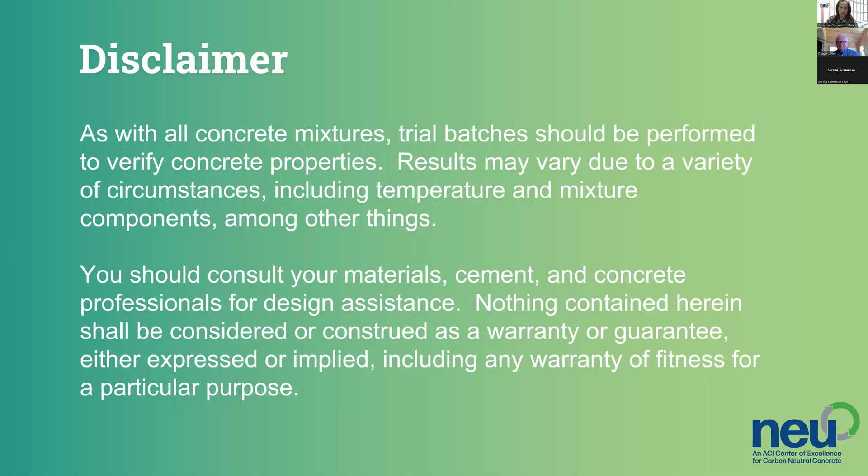Today's speaker is Professor Doug Hooton. He is the NSERC CAC Industrial Research Chair in Concrete Durability and Sustainability. His research involves finding ways to reduce the greenhouse gas emissions associated with concrete infrastructure. He investigates the use of materials such as supplementary cementitious materials, ground limestone, to produce a stronger and more durable concrete product. His research has informed the specification codes associated with the American Concrete Institute, the Canadian Standards Association, and ASTM standards. He has conducted research on slag cement since 1975.

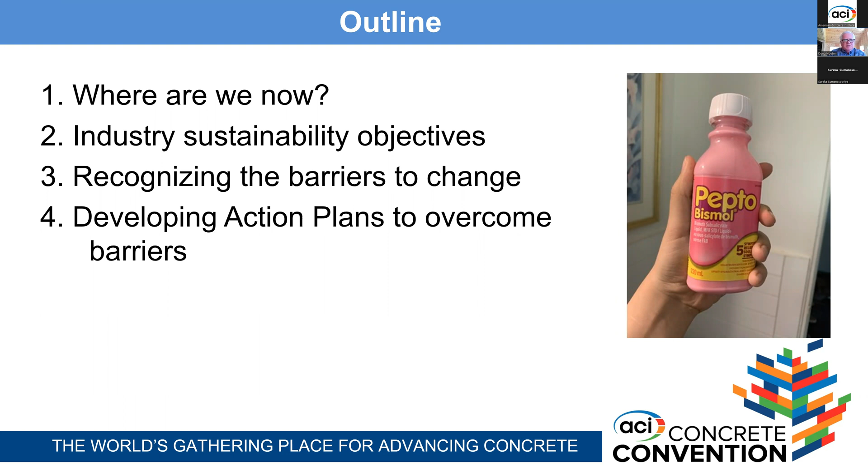But I thought I'd start and just talk about this. People talk about concrete being a high carbon emitter. But concrete is sustainable. It has the lowest embodied carbon and energy footprint of any construction material, at least on a mass basis. And it mainly uses local materials and typically has a long service life and is recyclable at the end of its service life. But we still need to do things better to reduce the global warming potential.

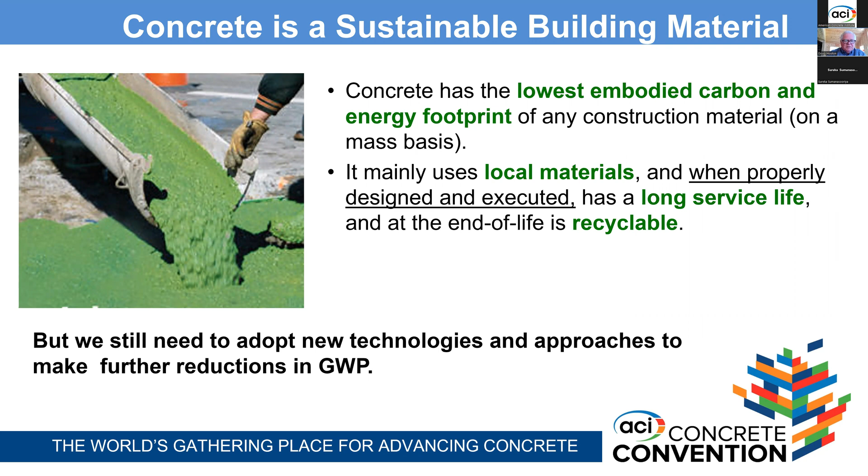So this is some data from the University of Bath that was developed some time ago, but it shows embodied carbon on the vertical axis, embodied energy on the x-axis. And you see all the materials lined up there. And concrete is on the lower left, which means it's the lowest on a mass basis per kilogram of any of the building materials. And if you look at cement, which is the biggest contributor to the global warming potential in concrete, it is further up, that blue circle there.

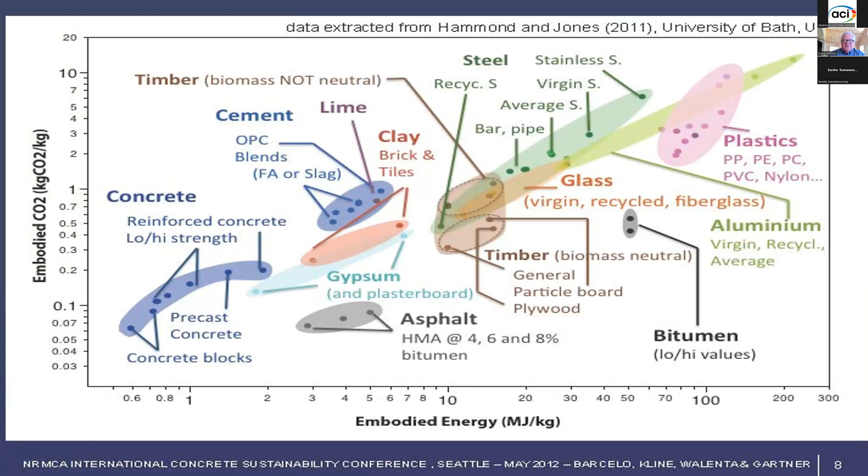Now, the other materials, let's see, glass, steel, even timber are up further on this. And again, a lot of this depends on how you account for things, but they were looking at all building materials and not with any reference to any one.

So what causes this is that we use over 20, in fact, this is probably out of date, billion tons of concrete each year. So the global impact of concrete is about 7% of the anthropogenic CO2 that's emitted and almost 4% of the energy. However, in the industrial nations like Europe and US and Canada, it's only in the range of 1% of total emissions. And that's EPA data. But the big players in this market, the large volumes here, the 20 billion tons, they're coming from China, India, and it's growing in Africa.

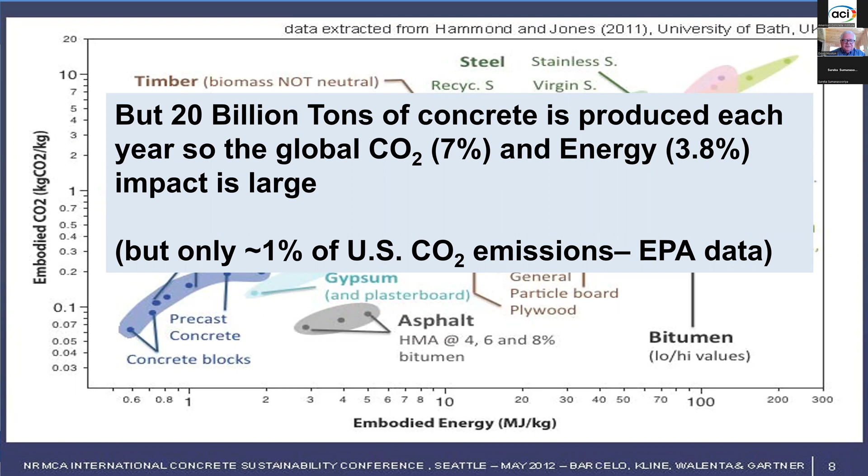China produces more cement in 2 or 3 years than the US did in 100 years. So it's a different scale. But again, Portland cement is just one part of the concrete. If you look at this concrete data, about 96% of the CO2 coming from concrete is coming from the cement, the dark blue. And about 85% of the embodied energy is also from the cement, if you're only using Portland cement concrete.

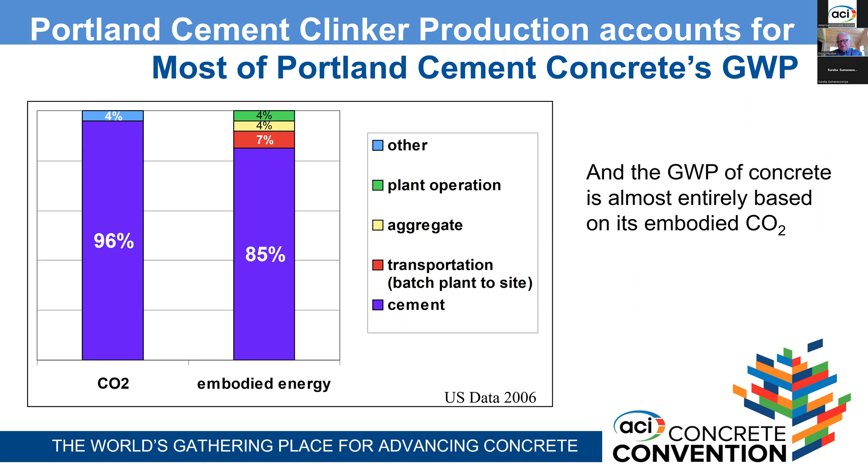And most of the global warming potential in concrete is based on its embodied CO2. We don't have a lot of the other types of issues. However, the US concrete industry has reduced its carbon footprint significantly between 2014 and 2021. And that's based on industry-wide third-party EPDs, environmental product declarations, surveying all their members in 3 different time periods, 2014, 2019, 2021. And you can see they've reduced their carbon footprint by 21% over those 7 years.

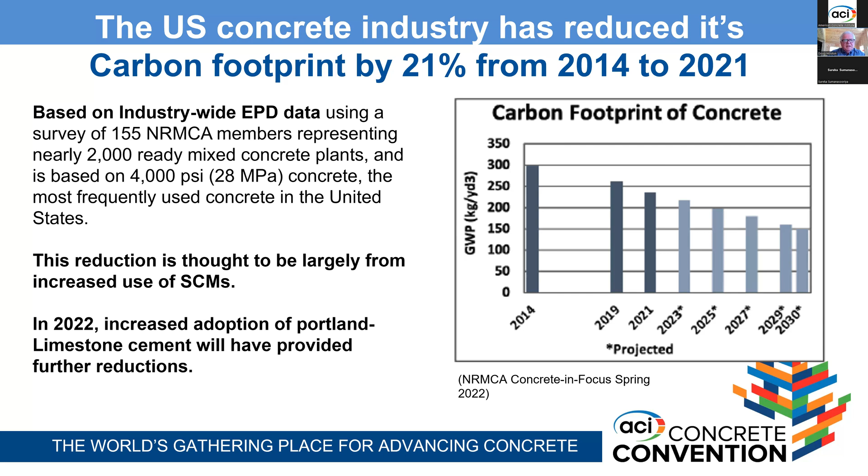And that was before Portland limestone cements were introduced in a big way in 2022. So it doesn't include that part of it. And it'll continue to go down. So the reduction between 2014 and 2021 is largely thought to be due to the increased use of supplementary cementitious materials. Now, the whole cement industry is focused on accelerating its reductions in global warming potential.

And they have developed a roadmap that came out in 2021. The Canadian Cement Association just came out with one recently. The Europeans have one as well. And they follow a similar approach. They want significant reductions in embodied CO2 by 2030, and net carbon neutrality by 2050, which is the global goal. However, getting to net carbon neutrality is probably going to require things beyond what I'm going to talk about today, including carbon capture and sequestration and use of non-CO2 emitting fuels like hydrogen or electric firing of kilns.

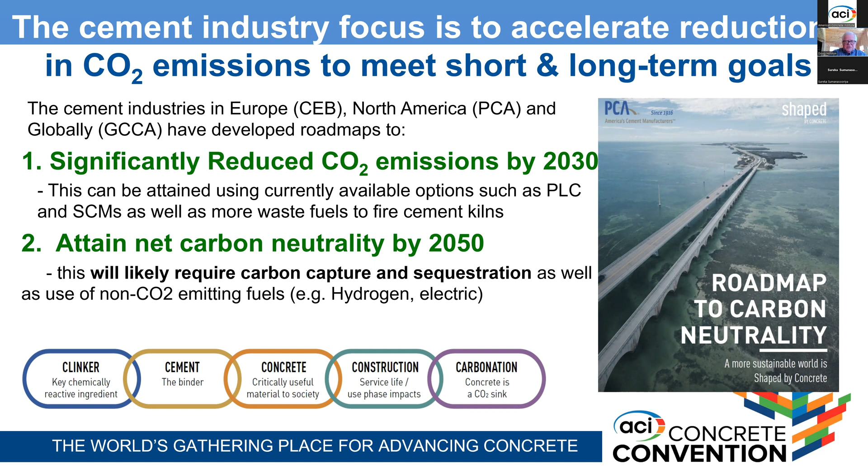And of course, there's 5 points on the chain at the bottom. They start with the cement clinker, which is where most of the CO2 is coming from. Then how much clinker goes into the cement that's sold. Then minimizing the cementitious materials in concrete. And there's things you can do in construction to reduce the amount of concrete that's used, more efficient designs. During its life, concrete also carbonates to some extent, so approximately 8% of its initial CO2 is taken up by the concrete in structures over its service life.

So what are the low-hanging fruit? If we're going to go for 2030 goals, which is only 7 years away, we've got to do things now. The low-hanging fruit available in the market now, allowed in standards including the building code: use Portland limestone cement. They offer about a 10% CO2 reduction over straight Portland cement with very little change in performance. I shouldn't say no change. There might be small differences in admixture dosages required, and you have to do optimization with any new material.

Increase the levels of supplementary cementitious materials in the concrete. The CO2 reduction is proportional to the cement replacement. You're replacing cement clinker by putting SCMs in the mix, as long as you're not increasing the total cementitious materials content. And one that has great results but isn't being used very effectively in North America is optimizing total aggregate gradations. You can reduce the cement paste fraction by better packing of the aggregates, which typically need at least 3 size ranges combined together to optimize.

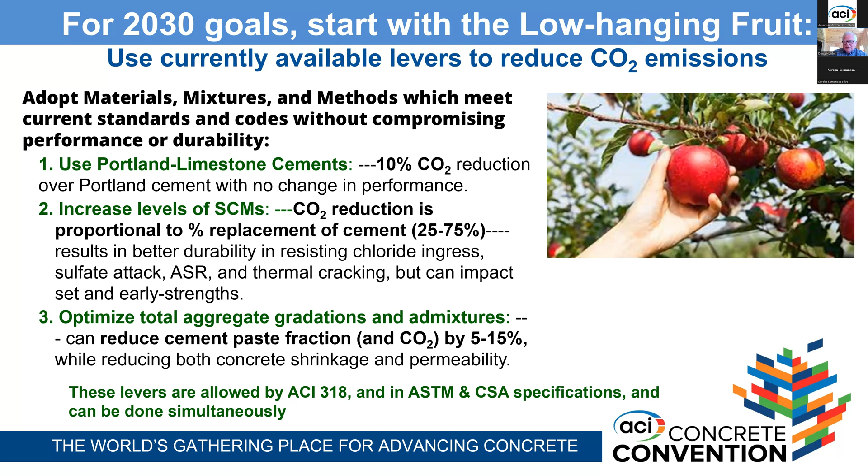And you can significantly reduce the amount of cement paste you need in the mix by about 5 to 15%. At the same time, you get reduced shrinkage and reduced concrete permeability, because shrinkage and permeability take place in the paste fraction. So if you reduce the paste fraction, you reduce those. And chemical admixtures allow us to do that while maintaining the required workability for placement.

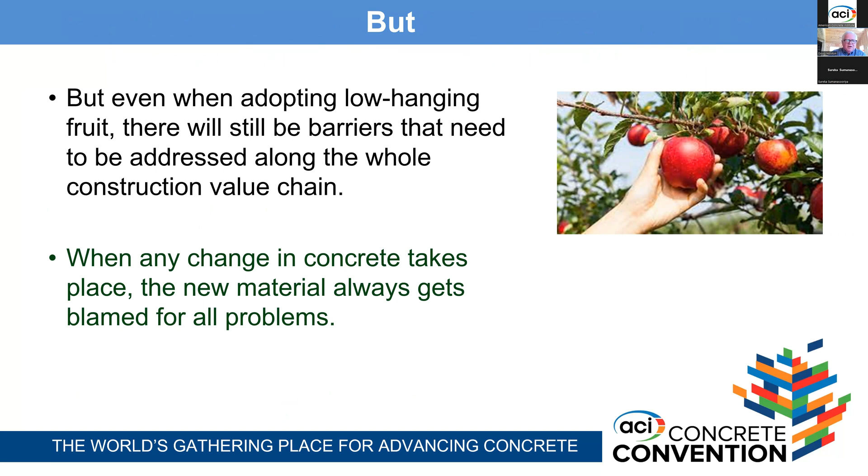But even with these low-hanging fruits, there will still be barriers that need to be addressed along the construction value chain. When a change in concrete comes along, the new materials always get blamed for any problem that occurs, and problems occur every day of the week in various applications. One example is the slow adoption of Type IL cements under C595. They were approved in 2012 in the United States through ASTM and AASHTO, even earlier in Canada.

And they meet all the same setting time and strength development requirements as a Type I/II Portland cement, but have 10% lower CO2 emissions. They've been used in Europe for almost 40 years now, and in some US states for almost 20 years. Colorado and Utah are 2 examples, and they were used before IL was available under the C1157 performance specification. So it's been used in interstate pavements and other applications since 2005.

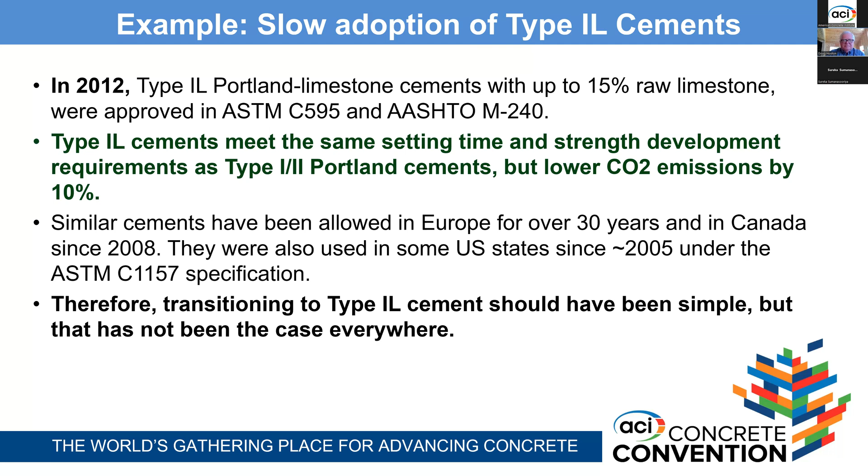Therefore, transitioning to Type IL cement should have been relatively simple, but it hasn't been the case everywhere. And why did the cement plants suddenly stop producing Type I in some areas and jump to IL? Because of supply chain restraints. Cement plants and terminals don't have the silo capacity for holding a cement that's not being purchased by their customers. So if they weren't required to use 1L, nobody would order 1L.

If you make it 1L, then they don't have room for I and 1L in their silos, especially when there's a shortage of cement materials. So this forced them to jump into an adoption of 1L cement. So in 2022, it was adopted. They made decisions in certain regions to jump right into it. And so last year, IL grew to about 25% of the total US market. It's much higher in Canada.

Also on the supply chain issue, most concrete plants don't have the extra silos for handling additional cements. So if a concrete producer wants to use 1L cement, they probably don't have room to have I and 1L in the same plant and have whatever their favorite supplementary material is, fly ash, slag, or whatever it is they're using. And all DOTs pretty much accept IL cement. So it's not the DOTs that are holding us back.

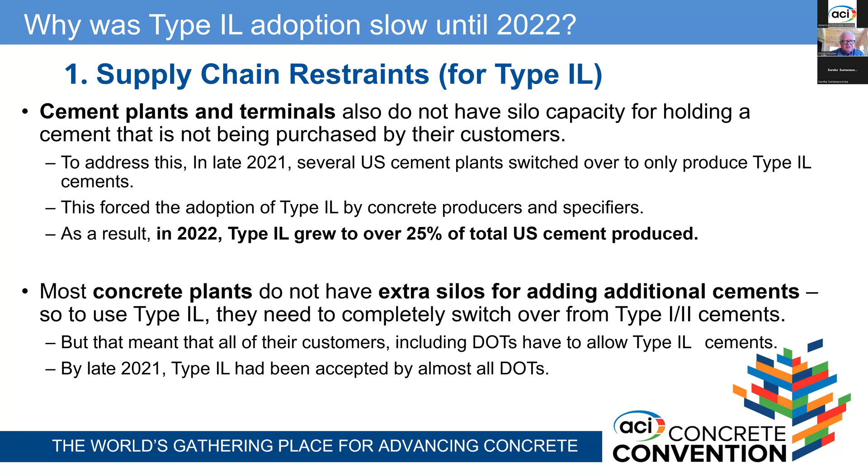Now, not everybody's a fast adopter. There's some reluctance to specify. Like I say, 2012 is when they were adopted in the standards. Some DOTs took longer than others. Caltrans, for example, was a pretty slow adopter. It wasn't until 2021 where they had finally adopted it, and only after they did their own internal study showing it did no harm. And it turns out the study that was done for them showed exactly the same things that had been shown earlier when it was developed.

But there's a lack of trust in the industry in some of this reluctance to move on to new things, and lack of trust in the experience and research done by others. It wasn't done in your own backyard sort of thing. So if we just take IL cements into the specifications slowly, then we're not going to make this deadline. We don't have 9 years left to meet 2030 targets. So we need to accelerate the adoption.

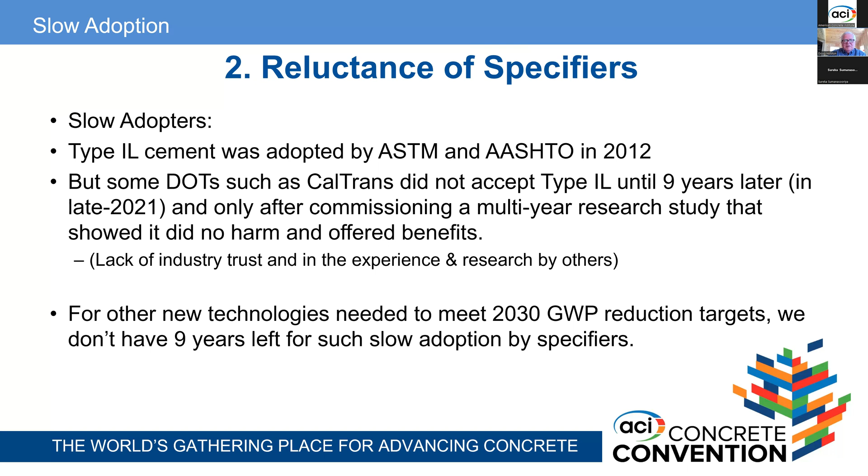And there has been pushback. In most places where Type IL was rolled out, there's very little concern. People are just using it. If there was a change, they made minor adjustments. It's typically what you do anytime you switch cement supply at a ready mix plant. You're going to do your own in-house verification of your water content, your admixture requirements to get the properties you need out of your concrete.

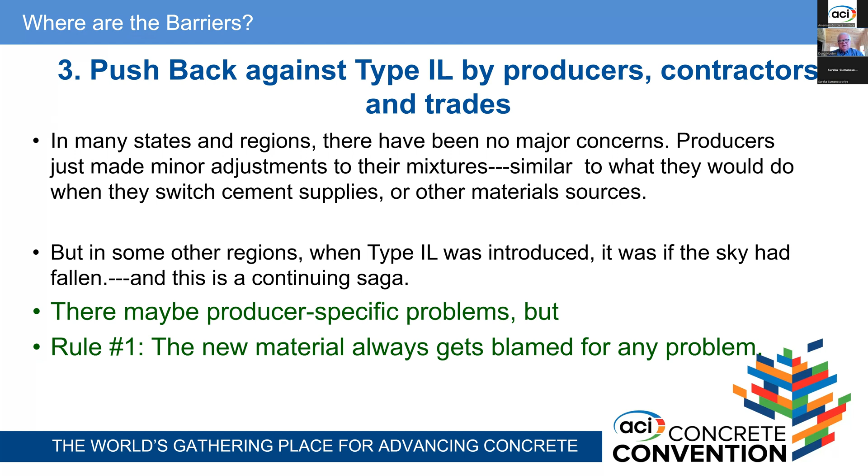But in some areas where it was introduced, it was as if the sky had fallen. And this seems to be carrying on in certain areas, but it's not huge areas. So rule number one, going back to what I said earlier, the new material always gets blamed for any problem. So when people have problems, if there was something new in the mix, that's what gets blamed. It's not the first time that's happened in my career. And so these are some of the examples of claims. People claim all kinds of interesting things.

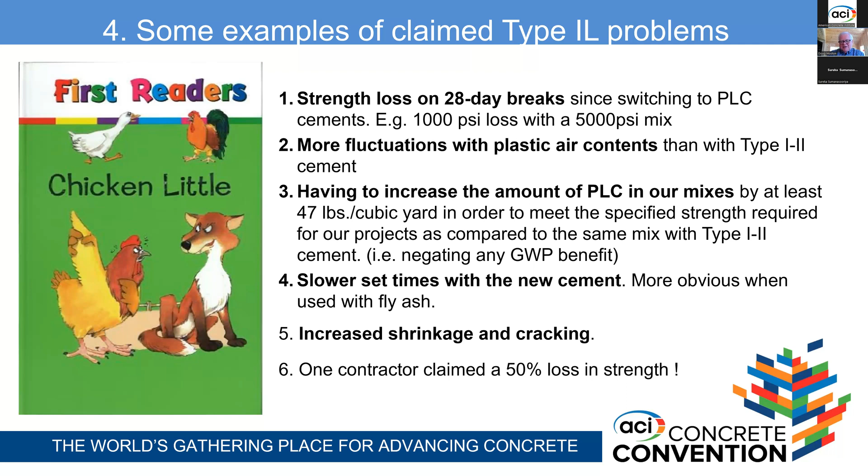Strength losses at 28 days since switching to 1L, 1,000 PSI loss in a 5,000 mix, more fluctuation with air contents. Again, that's admixture adjustments. Having to increase PLC by at least the amount they took of the limestone in the mix, negating any effect, slower setting times, increased shrinkage and cracking. One contractor claimed a 50% loss in strength, and you know that's not going to be accurate at all. So people are blaming anything that happened to them on this new adoption.

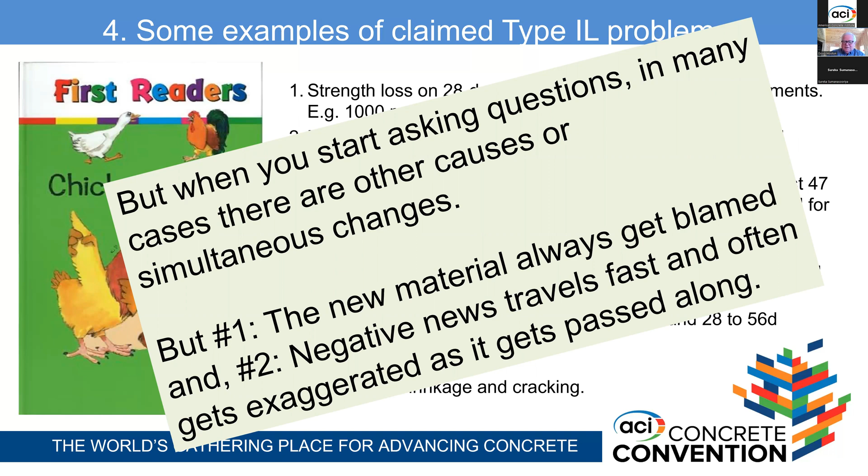And you start asking questions, and I've talked to various ready mix producers in various states where they've had some issues. Typically you find out other things were happening at the same time, or there's other causes. But again, new material always gets blamed, and negative news travels fast and often gets exaggerated as it gets passed along. It's like bad news everywhere with the internet. But there's lessons to be learned by everybody involved, including the cement industry.

You only get one chance to make a good first impression. When introducing any change, the industry has to supply sufficient customer support and communication to help that transition, especially with the smaller independent producers. A lot of the big integrated producers were aware of it, so they didn't have any issues. And again, helping make the required changes, giving suggestions on admixture changes and other minor adjustments. But we need to anticipate these and overcome these barriers to meet targets.

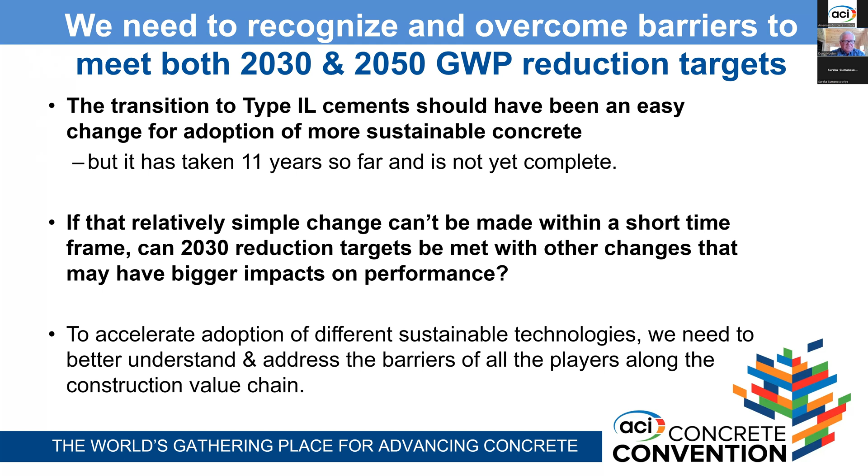The transition should have been an easy change to more sustainable concrete. But it's taken 11 years so far and it's not yet complete. They said about 25% last year in the US was Portland limestone cement. If we can't make that simple change by 2030, then how are we going to meet targets with other changes that are likely coming? They're going to have bigger impacts. So we need to better understand these concerns and address the barriers along the construction value chain to help speed things up.

So where are the barriers? People think standards and specifications and codes are the barriers. They're often seen that way. But many of the levers that I'm talking about for improved sustainability are already allowed in codes and standards, but they're not always widely accepted in practice, either due to perceived risk or supply chain issues.

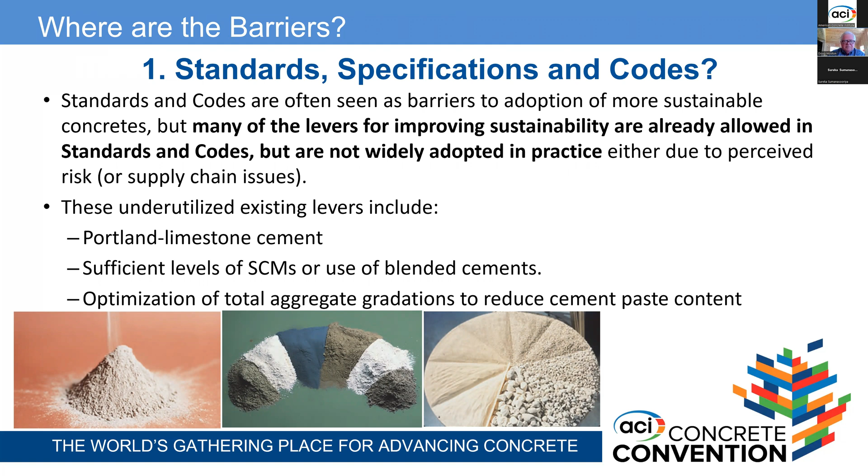These include the Portland limestone cement, sufficient levels of supplementary cementitious materials or blended cements if they're available in the market, and optimization of total aggregate gradations to reduce the amount of paste in the concrete. And you'd think that would be in the ready-mix concrete producers' best interest if they have the bins for it, because cement's the most expensive component of their concrete.

And specifications are changing. We now allow ground glass pozzolans, the 1866 standard. 618 has been changed this year to allow landfill coal ash to be harvested because of the reduction in the amount of coal power plants still producing quality ash. A lot of the stuff that's in landfills is better quality than the currently produced ash at a number of these plants. And it now is allowed to be processed to meet the requirements and sold as fly ash or as coal ash.

We're looking at a new performance spec for supplementary cementitious materials. That's still being validated. And the ASTM 1157 performance specification for hydraulic cement has existed since 1992, so over 30 years, but it's rarely specified. Because apparently everybody talks about moving to performance. We wish they had a performance standard that wasn't prescriptive, but when you give them a performance standard, apparently they don't trust performance. So very few people have adopted that, very few states or other specifiers.

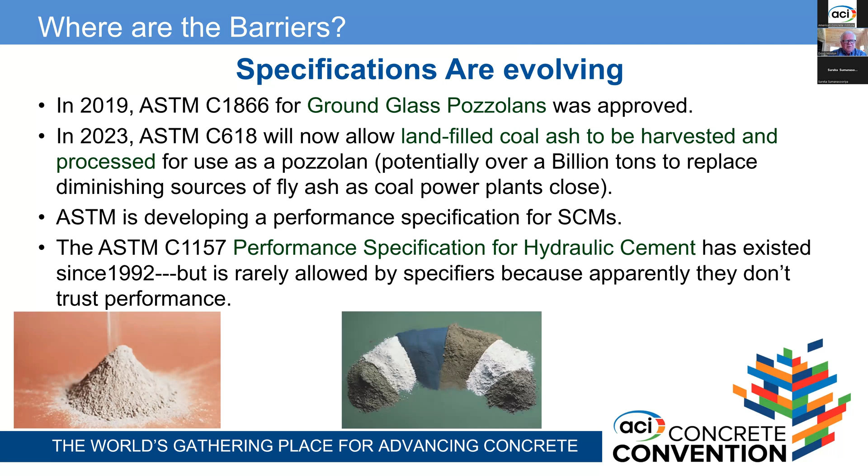And that's too bad because they seem to want to know what the ingredients in the cement are, as opposed to trusting the performance. It's like saying, well, I wonder what metal's in the car body of my car, as opposed to saying, I want it to last 10 years without rusting. Again, we need more standards that are less prescriptive.

But there's also non-hydraulic cement materials being developed. There's sort of the more radical out there versions of different materials that are potentially coming on the market. We don't have a standard set for geopolymers, or for cements that set by carbonation, although we're getting close with the carbonation cement standard. And of course, before you can go into a building code like the ACI 318, you've got to have a national specification.

And some of these new materials, the radical ones, and I'm not talking about the low-hanging fruit here, I'm talking about these further out there products. The test methods we have in C94, for example, some of the new materials can't be tested to the standards without making some small adjustments because they perform differently.

Now, ACI 318 does permit the use of alternative cements as long as the LDP, the licensed design professional, approves it and the code official who has jurisdiction on that project allows it. And the International Code Council has an evaluation service that has developed AC 529, an acceptance criteria for low carbon alternative cements. So it's an evaluation process, but I'm not aware that anybody's actually used it yet.

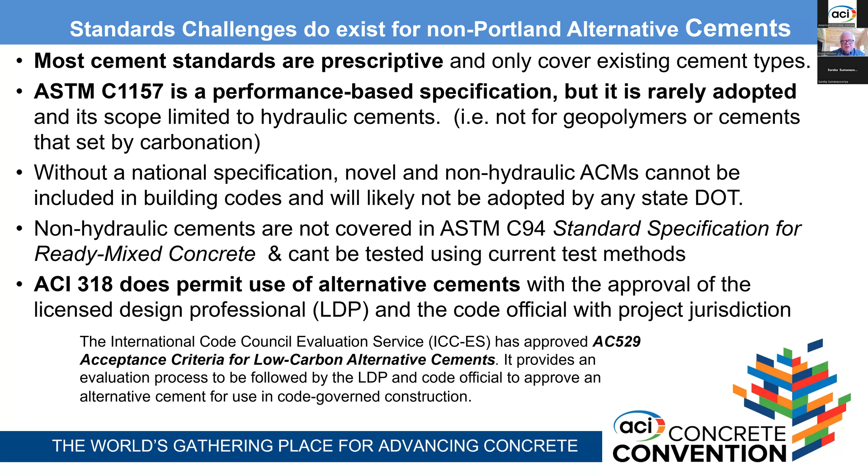And of course, one of the problems with specifications is specifiers aren't always using the latest specifications, the latest ASTM specs, the latest building code version. Design firms often cut and paste from previous projects because we've done it before, it's easier, there's low risk.

Some specifying authorities want performance, but they add prescriptive limits on materials and mix designs. Prescriptive minimum cement contents are not helpful if we're trying to reduce carbon emissions. And a lot of these minimum cement contents were based on work that was done 50, 60 years ago, before chemical admixtures and SCMs were on the market.

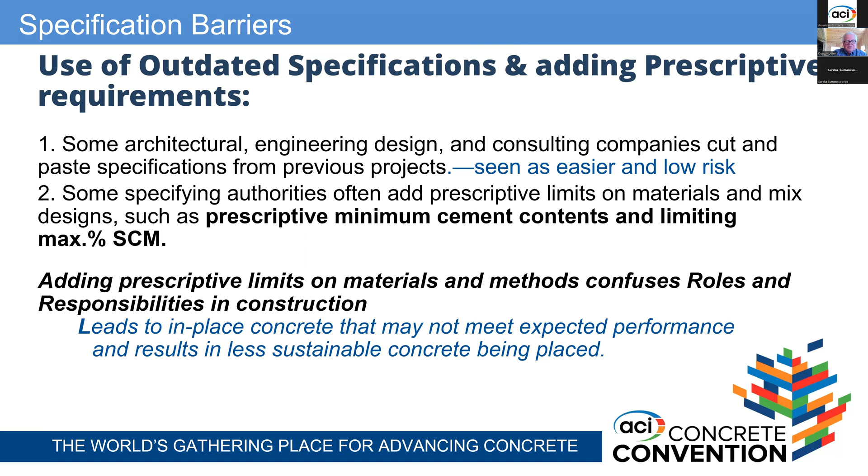And some of them don't allow using supplementary cementitious materials or optimizing for their use, again because of old prescriptive specifications that have been there for decades. And unfortunately, when you start adding prescriptive requirements on top of performance, it confuses the roles and responsibilities of people: the contractor, the specifier, the producer. And it leads to concrete that may not meet the expected performance and results in less sustainable concrete in the end. So current prescriptive requirements can make it difficult to adopt materials and mix proportions that can lower global warming potential.

For example, 318, just as one example, for chloride exposure, a C2 exposure, they only say you have to meet a strength limit, 5,000 PSI, or a maximum water binder ratio of 0.40. And apparently that gives you corrosion resistant concrete for structures, but those are indirect measures. Strength is there as an indirect measure of the water cement ratio, and water cement ratio is one input into what makes low permeability concrete that will resist chloride ingress. But they're not testing any direct measure of that chloride resistance.

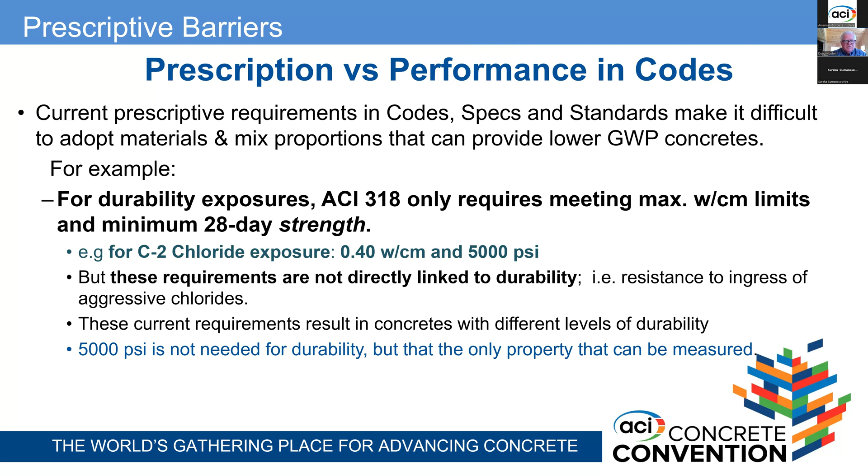And there's only one variable here. C2 covers all chloride exposures in 318. Typically, we don't need 5,000 PSI, you need low permeability, but we're not measuring anything that tells you that in that code. And just as an example, this is some work that Michael Thomas did, showing the Coulomb charge on the vertical axis versus water cement ratio on the x-axis.

And it shows three different concretes: straight Portland cement, 25% fly ash, and 25% slag plus about 5% silica fume. And it shows at the same 0.40, you could have a 2,500 Coulomb concrete with the Portland, about a 1,500 Coulomb concrete with the fly ash, and less than 1,000 with the green mix there at the bottom. So they'd all meet the C2 spec in 318 if they were 5,000 PSI and met the water binder ratio.

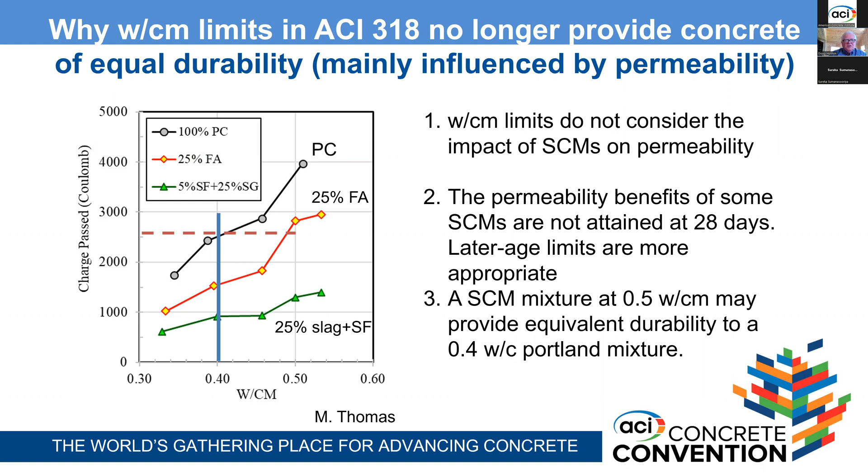But they're all completely different durabilities in terms of how long those things are going to last in chloride exposure. So we're talking about decades of different performance based on the different penetration resistance of those concretes, but they're all equal under the code at present, because there's no performance measure. So that's something we're trying to address, but it's an uphill battle.

So let's talk about the risk to adoption of new technologies. Life safety, of course, is a big risk, and certainly we're not going to compromise on that. It's the primary focus of a building code. And one of the issues with some of the really novel materials is they haven't been tested for structural properties, so everything that's needed isn't there: bond strength, flexural strength, shear strength, fire resistance, all those things that would be needed for a building code.

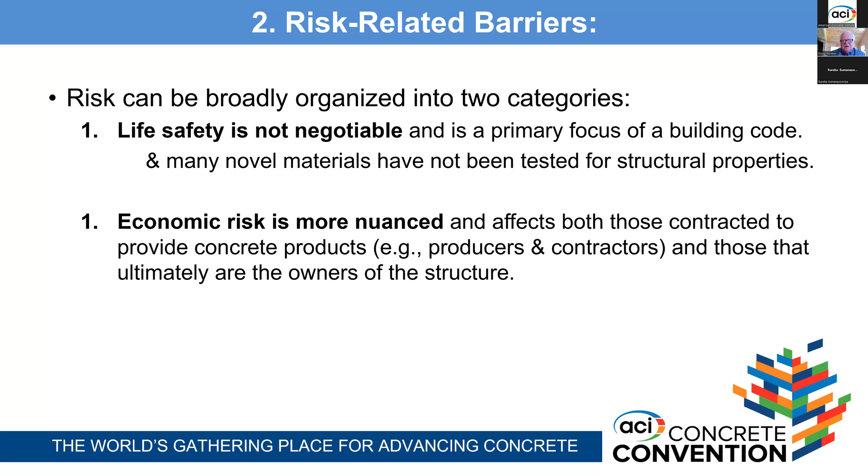But the economic risk is the bigger risk, because the materials I'm talking about aren't life safety issues. They're known materials, just in different proportions. So the risk here is more nuanced. People see different risks, both the producers and contractors, and those that are ultimately the owners of the structure. So where do people see risk?

Suppliers and contractors see economic risk when changes occur that affect their profitability or negatively impact productivity or the ability to achieve full payment for their work. So there may need to be incentives in contracts to incentivize meeting global warming potential targets.

Owners experience risk from loss of functionality, increased maintenance, or reduced service life if poor performance occurs as a result of using these new materials. And so adoption of new technology requires some sharing of risk. Non-equitable distribution of perceived risk can result in over-design and derail the implementation of a new technology or get rid of any global warming benefit that occurs.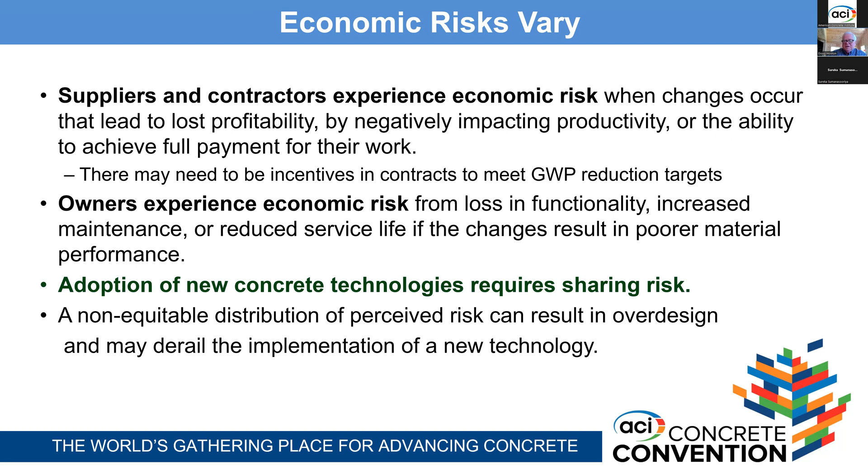So to move forward, everybody needs to be involved in that process. Not knowing why changes are being made ultimately leads to resistance. Engineers, designers, contractors, and trades all need specific technical training to implement these strategies or to be aware of them, and how it affects them. The licensed design professionals need to implement new technologies in ways that allow tradespeople to perform the construction. It shouldn't make it more difficult for them.

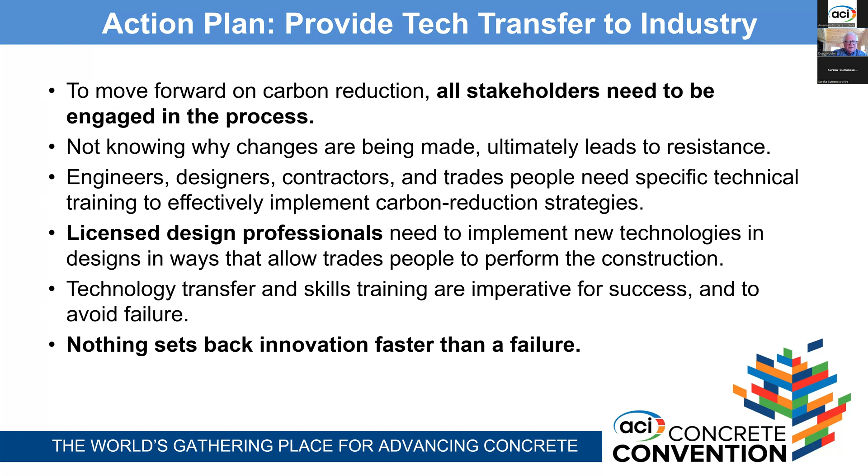Tech transfer and skills training are imperative for success and to avoid failure, because nothing sets back innovation faster than a single failure. Now, a lot of the design professionals who are in positions of authority are not materials experts. Concrete's that gray stuff that goes between the rebars they design. Nor are they always focused on methods for adoption of sustainable technologies.

So we need educational programs to make professionals aware of these options and to inform them on the benefits and potential concerns they need to deal with for different sustainable technologies. Some of them are no-brainers, some are more difficult. So they need it, and this also needs to include any impact on scheduling, which will affect the costs.

We need to provide the designers with practical tools for specifying sustainability targets, for assessing responsive bids, and monitoring construction. We need more tech support to reduce the risk for early adopters, and that's where some of the incentives come in. No one wants to be first. Once something is adopted and it's successful, then that risk seems to go away with most technologies.

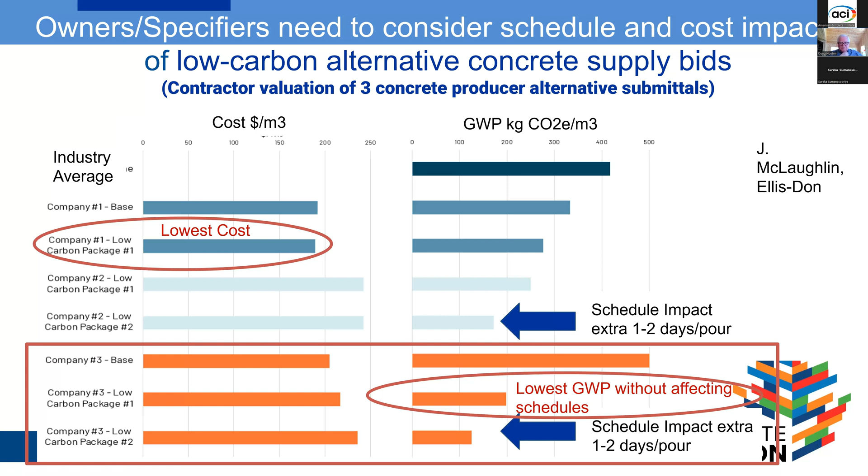Company 3 had the lowest global warming potential without affecting the construction schedules with that package number 1 that I've circled. And they had another one that was even lower, but it would have again affected the construction schedule. So the optimum in terms of lowest global warming potential without affecting schedule was that one on the right. Okay. So what do we need to do to help the contractors and trades?

Contractors need sufficient information to successfully bid on and complete a project that has sustainability requirements. They're used to dealing with quantities of concrete, the types of concrete, and getting prices when they're doing a bid. They need to understand how to bid with sustainable mixes. In other words, they need to know how it's going to affect their schedules and what's the green premium, the cost of doing so. And they need to inform their subcontractors, who are hesitant with trying new products.

Impacts of new technologies may be small, but they typically require changes to traditional practices. It might be just a difference in the way it feels to the finishers, or the timing of the finishing. It's just like when self-consolidating concrete was introduced, every contractor experienced a formwork blowout because they could place the concrete in these high lifts very quickly, but the formwork wasn't designed for it. But they know how to do that now.

When silica fume was introduced in the 1980s, the lack of bleed water resulted in finishing and plastic shrinkage problems. But that could be alleviated with fog misting or use of evaporation retarders on the surfaces to prevent that from happening. Now, some people still have an aversion to silica fume because they're still remembering the 1980s.

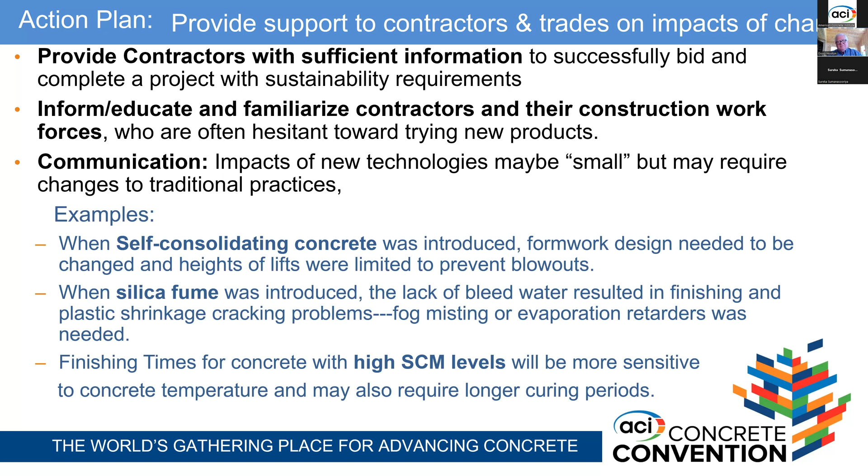So high SCM levels may affect finishing times as well, especially in cooler weather. And they also may require longer curing to reach the performance you need. So that needs to be called out in the contract. If you're going to do sustainable mixes, that will affect scheduling. And so we need workforce education.

There's an immediate need to work with our associations like ACI, the cement industries, or other trades organizations and product organizations that serve tradespeople and professionals working in the industry to provide training on these strategies, to just explain them. So it's not just mysterious. It's not like there's some different concrete on here today, let's make the best of it.

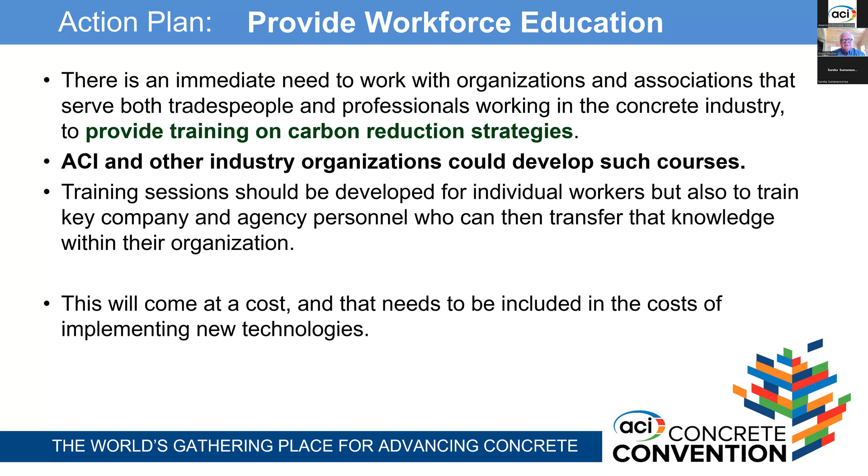And some of that will come at a cost, but that needs to be included in the cost of implementing the technologies. And people who want low carbon concrete need to recognize that the green premium isn't just the materials, it's part of all that dealing with the risk that everybody's feeling when they're bidding on projects and the need for education.

So there's a lot of activity in the policy end of things. Various state agencies and other groups, NGOs, are involved with policies to create a higher demand for low carbon. But some of these policies are being made in a technical vacuum. And some of these policymakers don't have sufficient knowledge of the industry supply chain and infrastructure. There are many types of concrete used on projects, for example, so you can't just say we're going to set an emissions target for concrete, because one project will use multiple types of concrete.

So you need to carve a global warming potential budget for that project, not on the specific mixtures, to allow that constructability, because a mass foundation, you can wait on that. But vertical columns, you can't wait on that because that's going to affect schedule. So you need different mixes used, and they'll have different global warming potentials. But you want to do it so it allows the flexibility of the builder to get it done in a timely fashion.

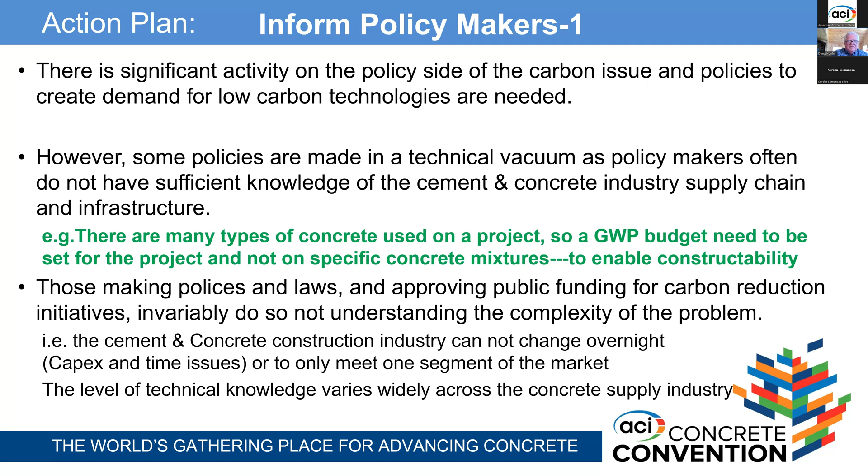And so people need to understand the complexity of the problem, and that's some of the work I've been doing with my colleagues with Breakthrough Energy and now with ClimateWorks to try and talk about some of these issues, get people involved so they all understand what's going on. So you can't make a change for one segment of the market. And we've got to recognize that the level of technical knowledge through the supply chain varies. Not everybody's on top of their game or fully educated on all the issues.

So there's a need to provide technical information to educate policymakers as well, so that laws and regulations that are developed are practical and implementable. Passing rules and legislation that can't technically be achieved only serves to build resistance in the user community and hinders progress.

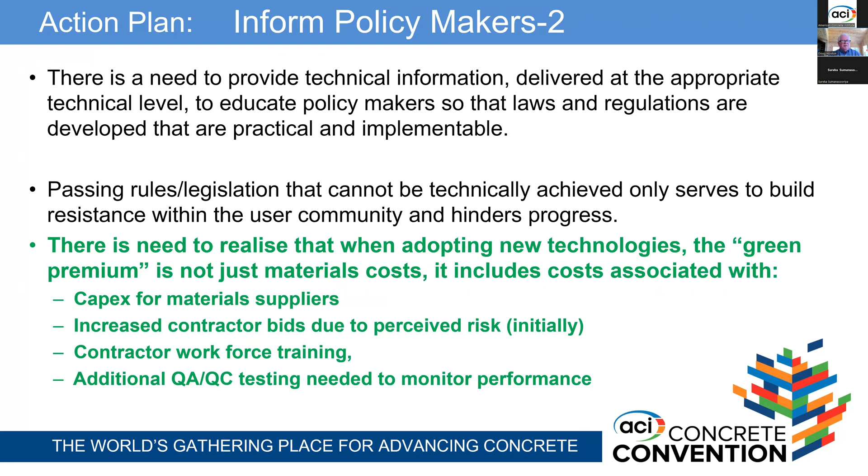And so, as I mentioned before, the green premium for low carbon concrete is not just the materials cost, it's costs associated with CapEx for material suppliers, increased contractor bids due to perceived risk, at least at the beginning, contractor workforce training, and any additional quality control, quality assurance testing needed to monitor performance when implementing a new kind of concrete for the first time. People want to know more about it and see that it's working. It may require more testing.

And now one thing, as I'm talking about these more radical low carbon materials, not the things we can do now, we hear about new products every day coming out. But what they need to realize is that there's an existing infrastructure in the concrete industry. So if you're going to have some new material, it has to be able to be batched into a ready mix plant, batched out of a ready mix plant, delivered in trucks and taken to a job site. It has to meet the existing infrastructure that's available, because making changes to that infrastructure is hugely capital intensive. And so people developing low carbon products need to think about that as well.

So to address the risk, one of the things that we've been dealing with is trying to develop demonstration projects. The biggest barrier is the perceived risk. So no one wants to be a first adopter. So if we do demo projects where these materials can be put into practice under real world conditions, where there's some underwriting by a third party or the owner, which in some cases might be DOTs, or maybe the GSA, with some of the IRA funds coming out.

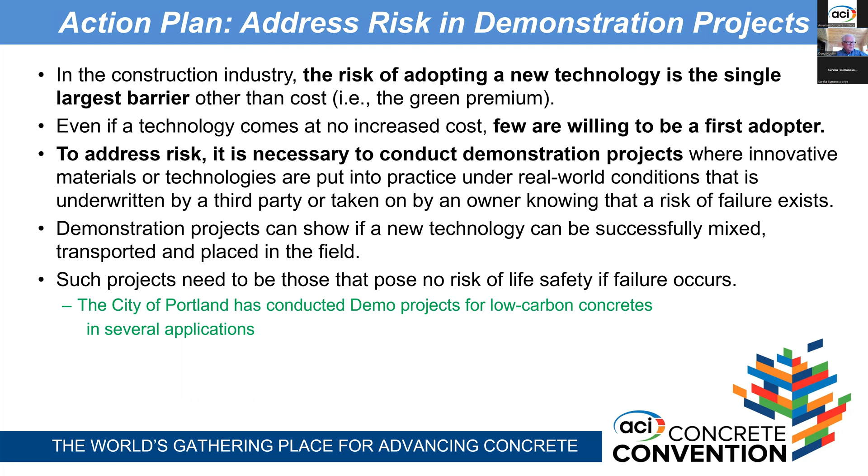You can try out products and make sure they work in the field. They can be successfully mixed, transported, and placed. And those projects need to be ones that pose no risk to life safety in case something doesn't work. City of Portland's done some demo projects for low carbon concretes, and they have a carbon budget approach to the way they approach projects as well. And they're not alone, that's just one example.

So demo projects help deal with this collaboration between the material suppliers, contractors, and owners. There's risk sharing. There's technical assistance provided before, during, and after construction, and performance is monitored. And we need a broad dissemination of results to build confidence in the industry. So if there's a good experience, we need to talk about it, make other people aware how it was done successfully.

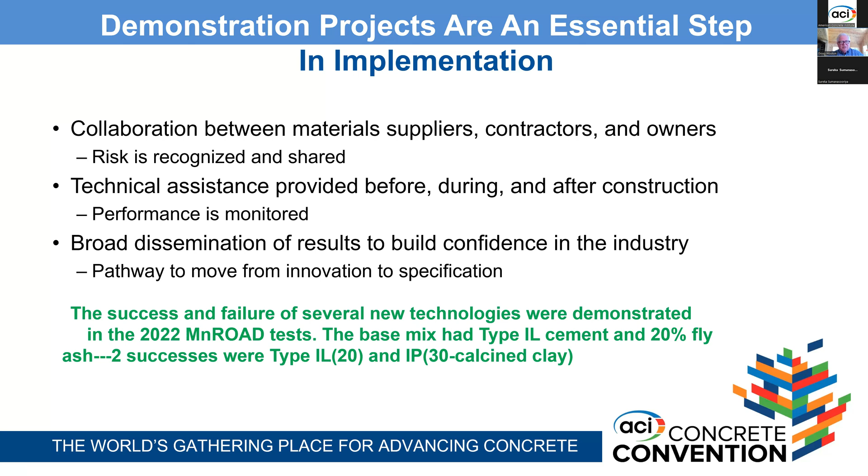And in 2022, the MnROAD project was done just south of Minneapolis, with a whole series of experimental concretes that Larry Sutter and Tom Van Dam were actively involved with the DOT there in doing. And they demonstrated several products that worked well. Some of them didn't work well. The base mix in this case, which they had to work downhill from on global warming potential, had a Type IL cement and 20% fly ash. The notable successes, ones that went further, were a Type IL with 20% limestone with the fly ash, and a Type IP 30% calcined clay mixture of cement.

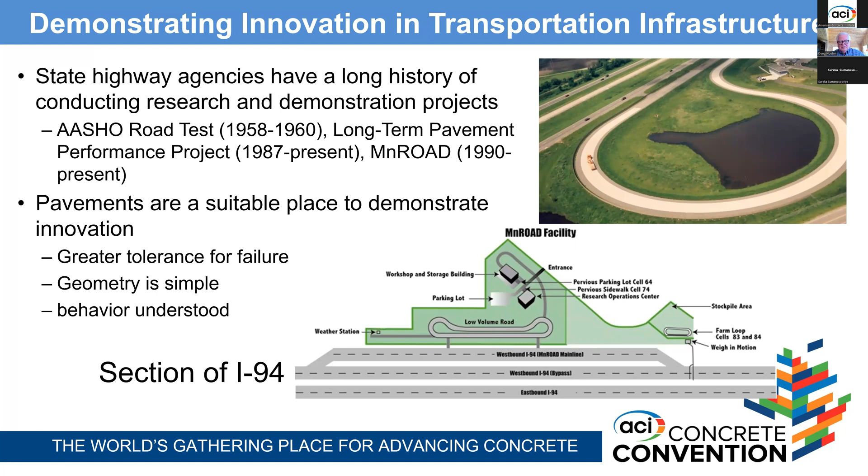It's just a sketch of that MnROAD project. They have a section of I-94 where they can divert traffic onto the test section, or if they're looking at the test section, they can put it back onto the main lines. It runs for several miles there. So it allows them to test the performance in the field and allows them to place it. So they placed it with ready-mix trucks and concrete pavers and did all that in real time.

So for new demo projects, where are the big plays? Well, 70 to 75% of the Portland cement and blended cement in the United States is used in ready-mix concrete. About 15% in precast concrete. And of that 75%, about 54% is used in the construction sector, and about 43% of that towards the public works sector. The four largest single uses are residential buildings, almost 40%, streets and highways, about 30%. Those are the big plays. So they have high volumes of cement use, therefore similar opportunities for carbon reduction.

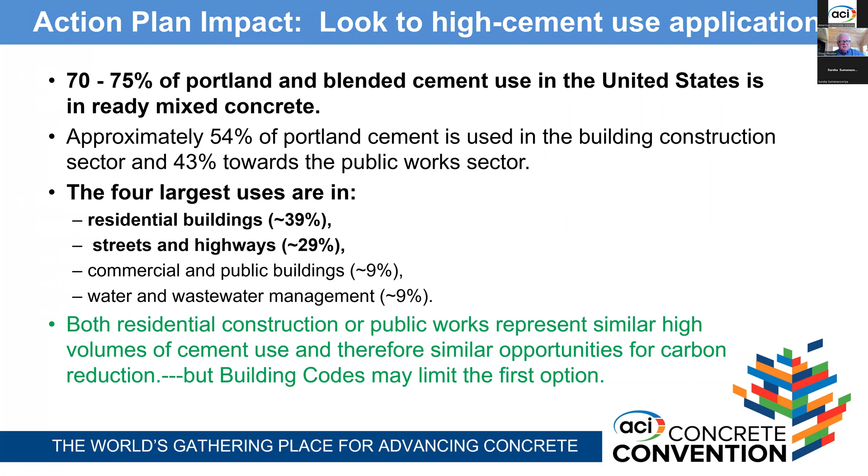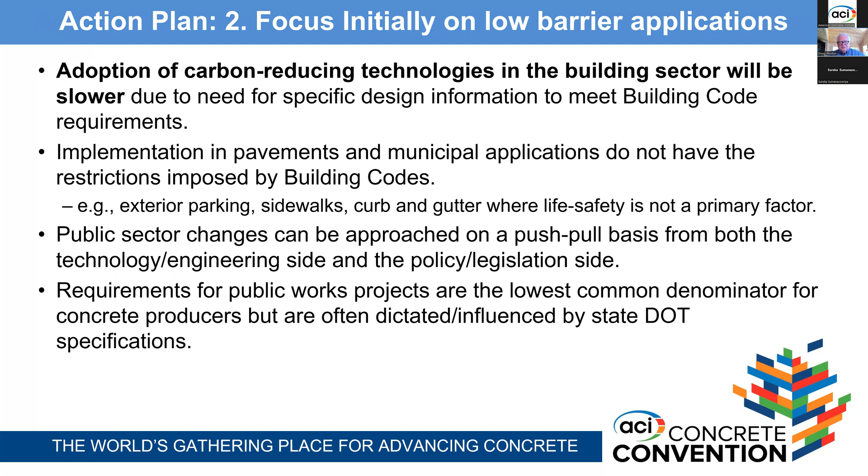But if you're going to worry about the building codes, then the infrastructure probably has less concern with life safety than, say, a building. Building codes are focused on life safety. So the infrastructure may be the easiest approach. Public sector changes need to be approached on a push-pull basis from the technology engineering side and the policy legislation side. And so public works projects are the lowest common denominator in getting some of these producers working with the DOTs.

So in summary, Portland cement-based concretes will still be used for most concrete applications. To meet 2030 global warming potential reduction targets, concrete's carbon footprint can be significantly reduced by adopting the materials and tools we have today. But we need to accelerate their adoption. And one way to do that is the demo projects. And we need to address the perceived risk along the construction value chain. Everybody has to be involved in the conversation. And where required, we need education of those people, in terms of how does this affect my job?

Because everybody's risk averse. If they don't know what's going on and something's changing and they're not comfortable with it, they're going to be risk averse. But if you can explain to them what potentially might happen, then maybe some of that risk goes away. And real world demo projects will show where these can be placed with current construction infrastructure.